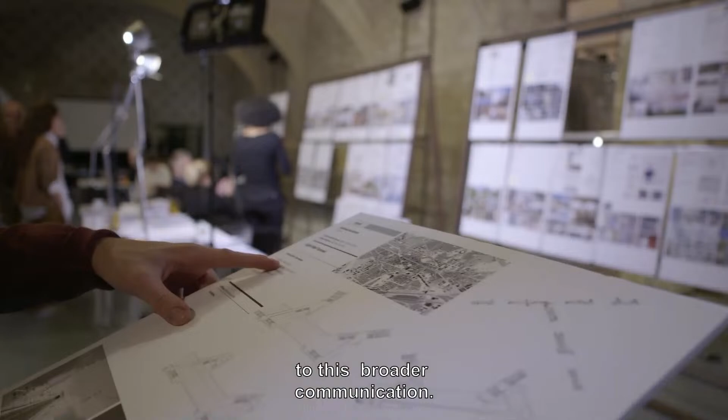I personally developed an agenda about social inclusion, contextual viability of the buildings, and innovation and sustainability. So these three pillars combined with the fourth one, that is simply beauty, which we somehow cannot take away when looking at architecture.

Architecture has to have a convincing narrative, otherwise it cannot convince the public that it should be accepted. This is the key. The architect has to find a way to explain his story. And if this is not clear, the architecture is not functioning.

Right now the energy is building up quite nicely. As you can see, we're getting a bit red cheeks, and the voices are getting a bit louder, and yeah, I guess the discussions are a bit more intense. So it's nice.

I think we need to work on a very thin edge. What I see has to have an impact on me, it has to shake me somehow. But at the same time, we want to always be aware of what's happening, how our work is impacting the physical world.

So if we're able to keep these two worlds together, maybe we can save a role for the architects in the future. When I look at the buildings, I have to understand what is behind the facade. So why is it there, for whom, and how can it be used?

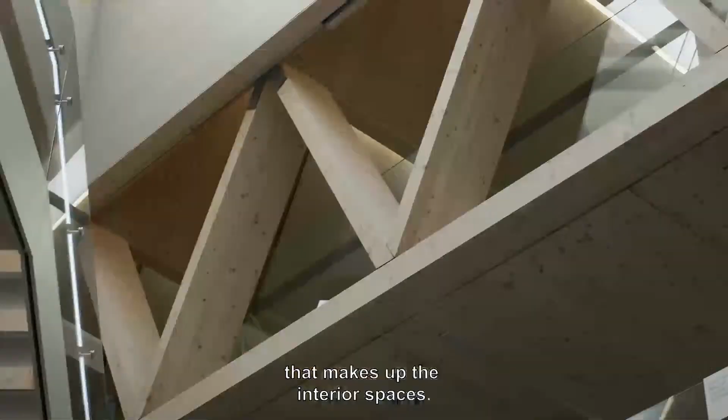And the second video we are going to see is about the winner of the Emerging Architecture Award, who we also have one of the architects later on here in the event. It is about the study pavilion on the campus of the Technical University of Braunschweig by Gustav Düsing and Max Hacke, Berlin.

I think the very shortest thing I can say about the building is that it's open in all means. It's open in its way to be used, it's open in the way it looks from the outside, and on the inside possibilities are open. It's meant to be a space where you can randomly bump into each other. So it's a bit of a counter model to, let's say, the digital sphere, where you don't accidentally meet people. It's full of life and people using this building inside and out. I see a really lovely mixture of interactions that we don't have at this university so far.

We wanted to create a building that really celebrates student culture. You can look at this building as a new kind of campus typology that puts the social and informal learning activities first and provides an alternative model to, let's say, a lecture hall.

Congratulations again to these winners, and thank you for your attention.

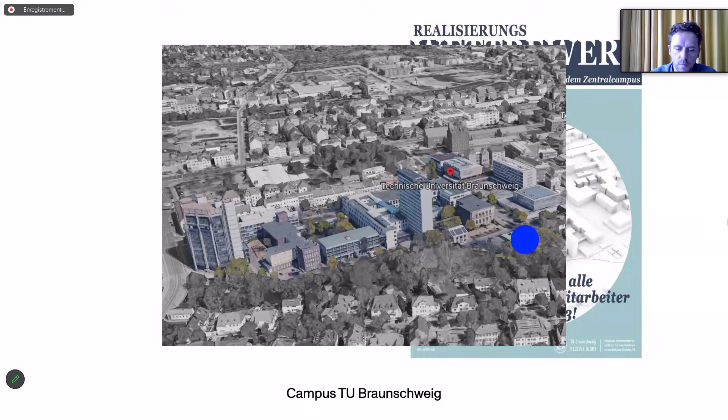So when working on these competitions, we were inspired by something at the university called the drawing rooms. They are existing spaces at the campus, going back a long time, essentially self-organized spaces by the students that really celebrate student culture. There are lots of parties, lots of social events, so they're not just a desk where you learn and work, but much more than that.

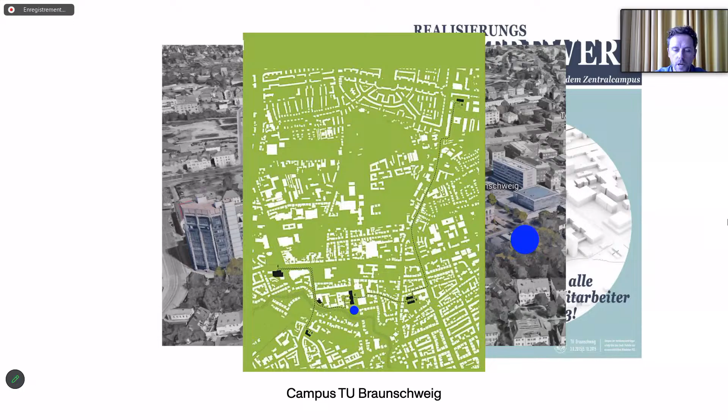So we thought all this really needs is a new framework, a new spatial framework. The culture is already there, and it really just needs a new infrastructure.

So we designed this building as one big open room, a democratic space for everyone. It is accessible from all different sides, has different levels, many stairs to articulate the idea of accessibility and visual connections inside the space. We also gave the building a covered outdoor space to extend the building into the surrounding nature and provide outdoor workspace.

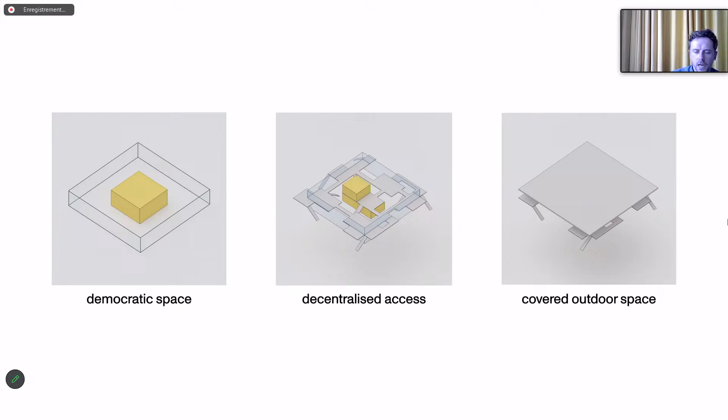So we've always looked at this building as essentially the living room of the campus. It is, on the one hand, the first building you see when you come to campus, but is also one that you can literally walk through on your way to somewhere else. So it has this social idea also on an urban scale.

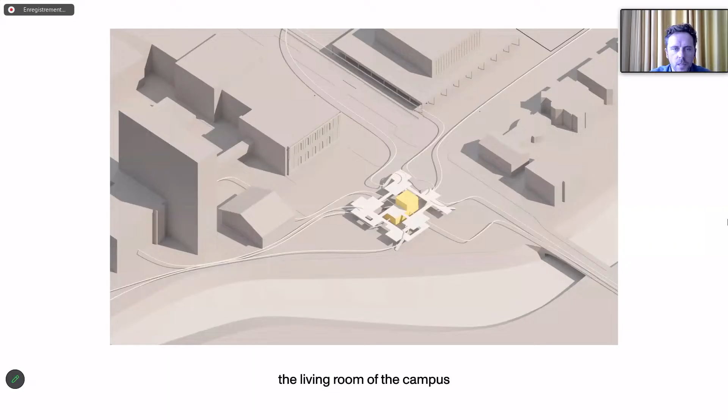Here's some references that inspired us when designing this building: Cedric Price's Fun Palace, and Yona Friedman's La Ville Spatiale, both examples of mobile architecture, an architecture that is highly flexible and can change tectonically on various scales.

And that's something we translated into this idea of a superstructure, which is essentially just a 3 by 3 meter structural grid. That provides, beyond the structure of the building, also the technical infrastructure of the building. So you can plug yourself with your laptop into a column, for example.

And it can thereby change on a daily time scale very rapidly. It can change on a more yearly scale too, in that it can be densified if the requirements would ever change on campus for more space, and it is completely demountable also. It can be taken apart back into its original pieces, transported somewhere else, and put back together in a different form, possibly also for a different use.

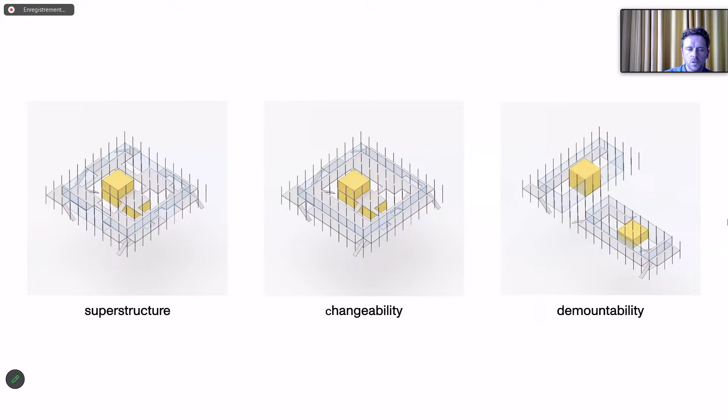While designing this, it was very important for us to keep a level of simplicity in the construction. So it is a steel-wood hybrid construction that is essentially based on only one module, which is a 10 by 10 centimeter steel tube that makes all the columns and beams, and inserted are the timber platforms held in place by various staircases that are structurally stiffening this building.

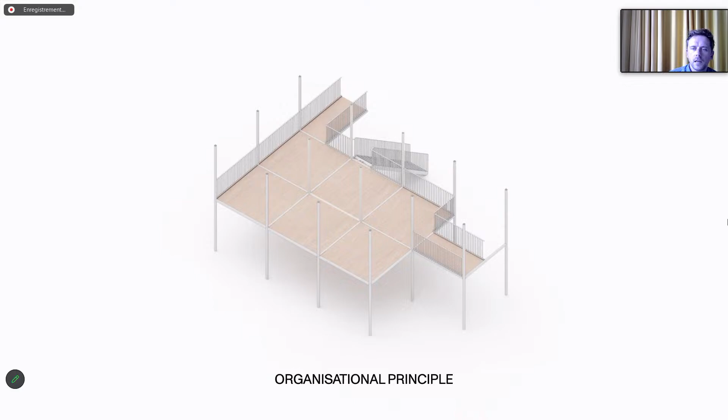And when you keep adding these elements, you create islands, you create bridges, you create a really flexible workspace, but also one that creates an enormous amount of density and spatial complexity while also being very simple. This was very important for us: to have this very simple kit of parts, which relies on very few elements that are repetitive and repeated throughout the buildings. But then when you put them together, it creates a very complex spatial framework and network.

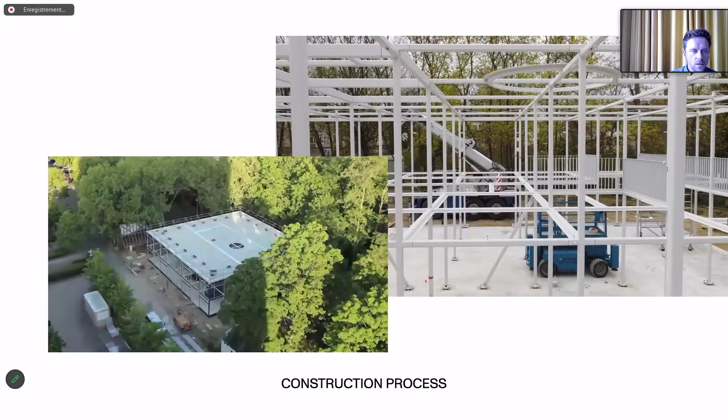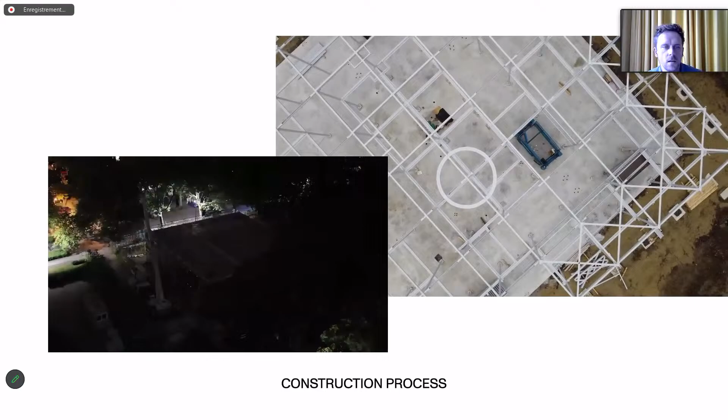Here you can see some videos of the construction process on a time lapse, where you can see how quickly this whole thing was built because of its modular qualities. This only took something like 3 weeks to put together - that is the entire structure, including the facade and the roof structure. And then here you see the outer colonnade being put up as well. This, as I said, is a very quick time lapse.

A little word about the sustainable or energy efficiency aspect: the building is a lightweight structure that heavily relies on renewable energies. It is connected to a district heating system, and in Braunschweig, the district heating is one of the most sustainable ones in Germany, relying on more than 80% renewable energies.

The building also has a geothermal cooling system. Both heating and cooling work via the underfloor heating system, and the building is fully naturally ventilated, so there's very little technical infrastructure in this building. There's very little solar heat gain in summer due to the overhang of the roof, but in winter, when the sun is low and you do want the solar heat gain, and there's no leaves on the trees around, you do get it.

The building has extremely high acoustic standards, so when you walk in, almost everyone has this experience of, wow, this is actually better than we thought. And it has obviously incredible daylight qualities, so there's very little use of artificial lighting. There is a photovoltaic and green roof plan - it hasn't been realized yet due to a lack of funding, but the capacity of the building is there and will hopefully be realized soon.

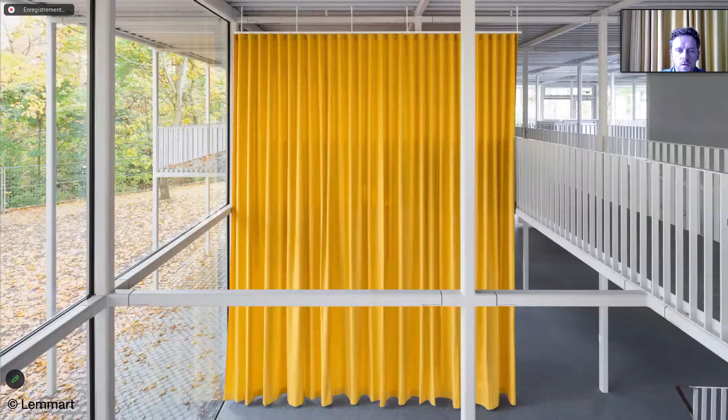This is shortly after completion, when you could fully experience this new campus infrastructure, almost like an X-ray vision, still empty. There are a few moments throughout this building with many double-height bridges that give students the possibility to experiment, potentially prototype on a large scale.

The building opened about 1.5 years ago. At first, students were very timid and weren't really sure what type of building this is and how to act in this building. And slowly they're coming to understand that it's really their building, a building for them to inhabit and to control.

And this is some footage from last summer where you can see how this is really becoming more and more a buzzing space where people carry out the furniture into the outdoor space and work there. A lot of group work, a lot of workshop is happening, a lot of communication and exchange.

And as I say this, I'm coming to the end of my presentation. There's actually two more slides. There's a little word about the exterior space, which is a space that is obviously used in seasonal change when there's spring and summer. That allows for an additional expansion of the building. And yes, now I'm at the end of the presentation, as we can watch this flyby video of the end of the day in an autumn day in this building at TU Braunschweig. Thank you.

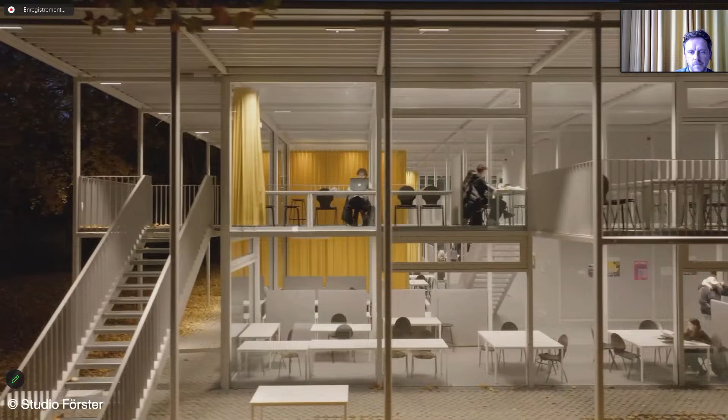Thank you so much, Max. What an amazing insight into the process and how you have thought about using resources to achieve high quality of life and environment. I think you mentioned before the new social and collective dynamics, and I think we can really see how these many priorities and drivers come together in this building, and I'm absolutely not surprised that it was picked as the award winner this year. I hope you can stay on to field some questions in about 20 minutes once we have had Sophie's and Jose's introduction or presentation as well.

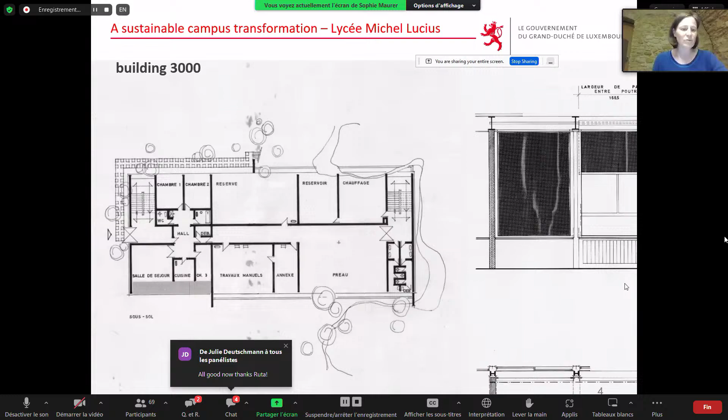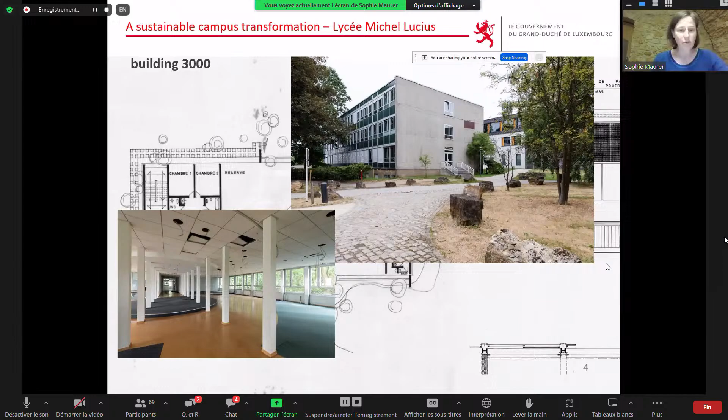So again, we have the building of the 70s, we have the temporary building of the 90s, and we have the central courtyard, which has been used from 2018 until our project in 2019 as a parking lot, which was a little not what was intended at the beginning. Then we have the existing building 3000, which had to be liberated because it could no longer be refurbished or used. The structure was not strong enough to support what we needed to adapt it for use.

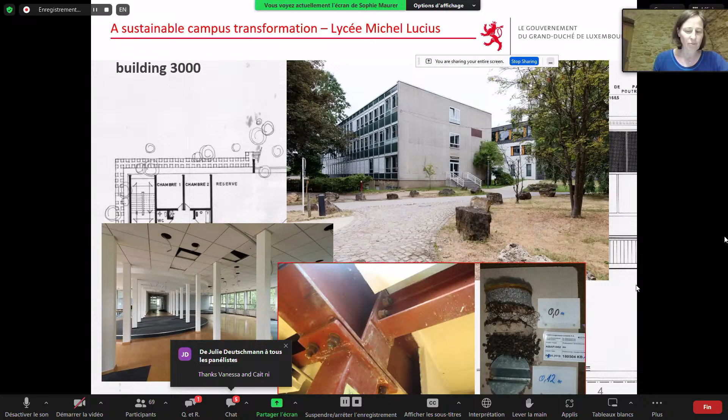Here you can see we have a steel structure and the flooring, which was quite minimal. You can see the corrugated steel, and there was not much above.

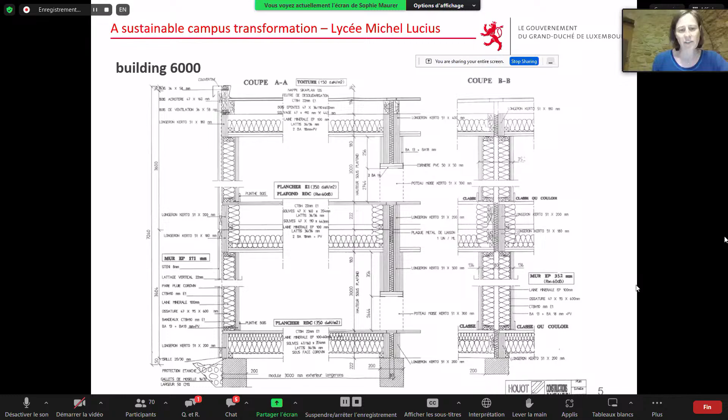The 6000 was similar, but it was a wooden structure, and it was a temporary building which was still there in 2019. There were only classrooms in this building, and we didn't have lots of plans, so we had to make openings to see how the walls were constructed. That was actually where we started.

We had the building 3000, which we could no longer use, with a library inside, and we had the 6000, which the school didn't want to use anymore. What we thought was fit to be refurbished and to house the library.

Then we had a few different topics we treated, and it wasn't this linear project. It was more something came and then something else and then something else came again. And so at the end it became a whole project, but it never started out as this project.

So we worked on the public tender process, working out how to give away furniture that we were no longer using, but the state is not allowed to give away something. So we had to develop a system how to make a contract with someone so basically they could get this furniture, and we set this up.

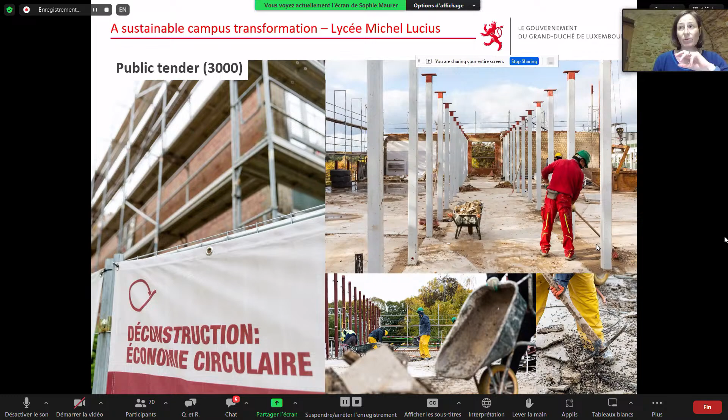Then we developed a system how to rate the procurement so that we could select other criteria than the price. That's an outcome of the project.

Then we were salvaging all the material we could, which was the aim of the project, because it was a pilot project. So we said, okay, we will see what we can get out of this building and see what we will do with it later. So you can see we had the steel, obviously, we had the window frames, but we also have the floor boards, the corrugated steel. Then we have the ceiling panels, and we have some bricks.

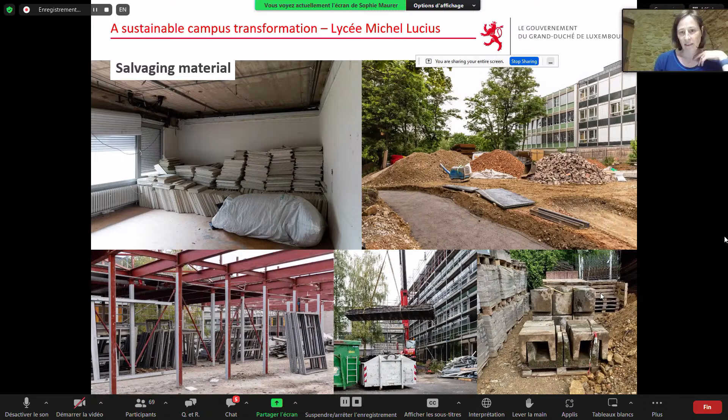For the 6,000, we said, okay, if we demolish the whole building and construct a new building, it didn't need to be as big as the first one because the library was smaller than the existing volume. We would need a lot of new material to build that. And then we made a life cycle analysis, which showed that we only needed a fraction of that, and we would cause a fraction of the environmental costs by refurbishing the building, even if this meant major transformations.

Then we did a small pilot project on concrete recycling. We worked together with policymakers to see how much recycled material we could use inside the concrete, which is still running. So they are evaluating how the concrete is behaving in the exterior. And I know that concrete recycling is already big in some countries, but in Luxembourg it's not yet. So that was an important step.

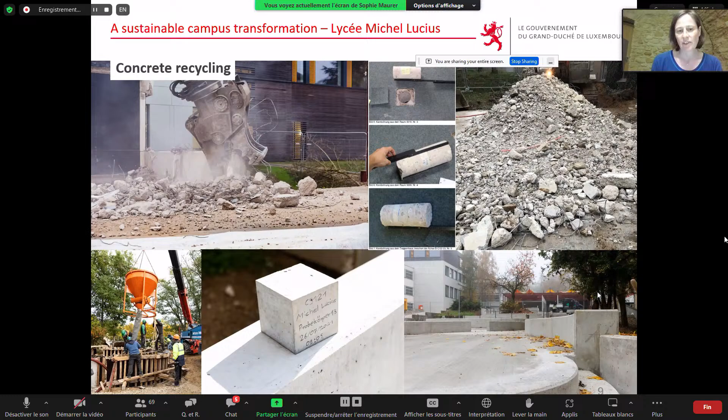Then we said, okay, we want to improve the comfort of the building. And we didn't want to put a lot of new technical equipment in this old building. First, I forgot to say that it's also another temporary use because the whole school campus is going to move away in about 10 years' time. So we looked for a solution that was easy and manual. And we found that the crawl space under the building was very cool in summer.

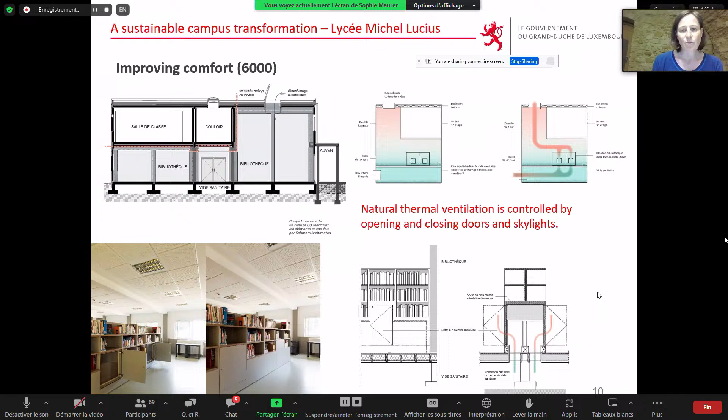So we could use the air coming through the crawl space and create new double heights for the library. So we had to cut out two classrooms, and basically that's our cooling system, and it works quite beautifully.

Then we also built with the reclaimed material. Here you can see the steel columns and beams we deconstructed from the old building. And we put up a new pergola, which we completed with new sails, so that we have a totally new quality on this campus.

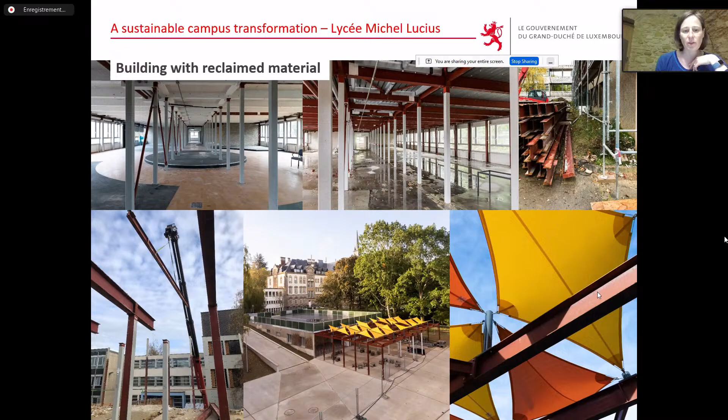You can also see that the basement was kept for a part, so that we now have new storage facilities for the school and also a new roof terrace.

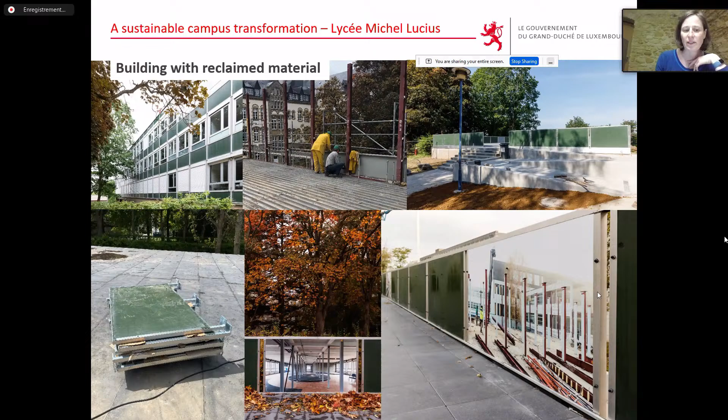Another example of reuse with the reclaimed material were the facade elements, which we used to build a new railing. We didn't have enough green elements, so we completed some of the just gray elements with pictures of the deconstruction. So now you can see on site what was there before and how we did our project.

What I said before is there were all different elements and they came nicely together, so that now we have this nice project which looks as if it would have been done by one person with a starting idea, but it wasn't. It was all small elements that came together over time. And with the idea of building something sustainable for the school, we were able to direct it all in just one focus.

Voila. And I'm always saying, you're not doing this project alone. No architectural project is done alone, but especially a sustainable reuse project, it's impossible to do on your own. So we had a very big team, and we were talking also with lots of policymakers, which was interesting because they were all very eager to help. We made the experience that everyone, when we came to them and said we have this problem, everyone tried to help. It wasn't always possible, but we found a lot of solutions like this.

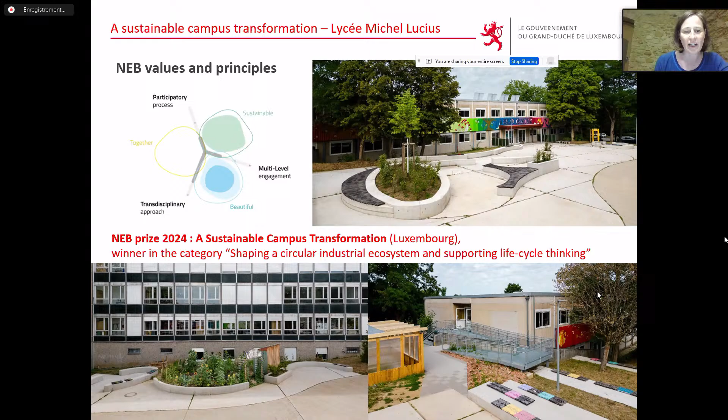So I tried to put this in the different frameworks. I'm not sure everything is correct, but here you can see the New European Bauhaus values and principles, and how I would rate this project. The Bauhaus criteria — here of course we don't have any economic background because it's a school, but we did work on the context, the functionality, and especially on the place.

And I find the picture on the lower left especially nice, because you can see on the other building they have the exact same facade panels, where you can see now in our railing that they are the same ones that still exist in the building. So you can see where they're coming from.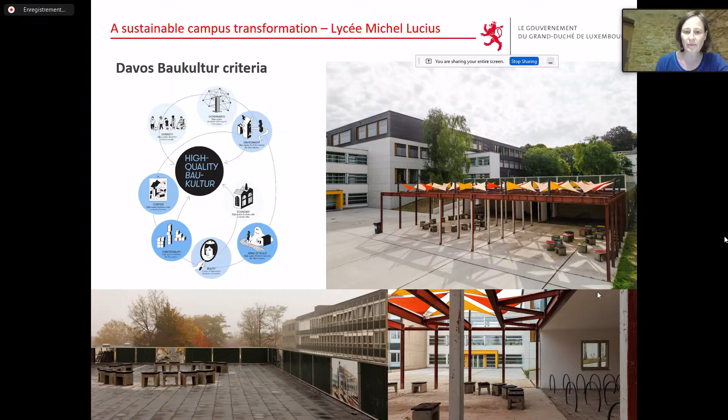And finally, the levels indicators. Yes, we worked a lot on efficiency, resource-efficient buildings and circular materials. We tried to make the most comfortable spaces possible, and also tried to optimize the cost and the value for the students.

If you want to know more, here's my contact, or we also did a publication where you can see the project in depth, but it's in French, so I'm happy to help. Thank you.

Thank you very much, Sophie. It's wonderful to see a project before and after, and such effective transformation of the public realm. It's also really interesting to see the LCA process helping to make design decisions, and we'll hope to touch on that a bit later in the debate. But thank you so much for sharing that example and the process of your thinking. I hope you can stay on for the questions.

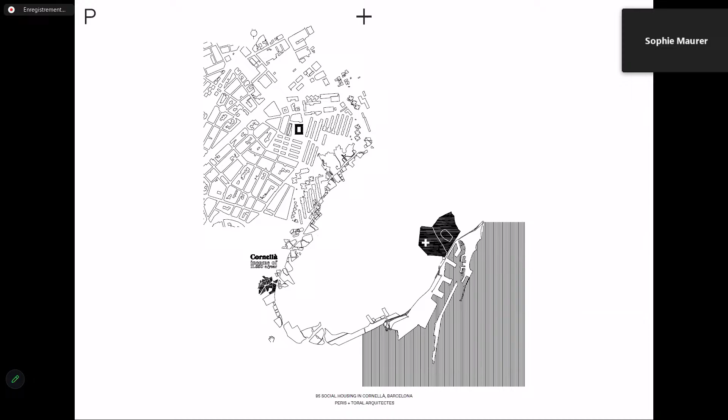We had this plot—it was a competition, a plot of 25 by 41—and the regulations told us we had to fit on this space and also have a patio of 15 by 25. That gives the sensation that we cannot decide the shaping for the city.

But then we decided, okay, let's begin the competition thinking from the interior. So what we did was try to change the unit of aggregation: instead of using the dwelling as the smaller unit, use the room as the smaller unit and make equal rooms.

So we fulfill the plot with equal rooms, and because when things are equal, there is no hierarchy, we think this is something that can answer some of the challenges we have in the 21st century.

When we have equal spaces, that means there's no bigger room for parents than for sons, and that means maybe new kinds of family, not only the nuclear family, can fit in these homes. Also, by equaling spaces, we gain some flexibility—flexibility of moving the furniture, because when spaces are equal, they're very easily interchangeable.

So the big question was: what has to be the size of a room for this to happen? In Spain, our regulations give very small rooms—a single room of 6 square meters, a double room of 8 square meters, a main room of 10 square meters. We thought that was not enough to be a living room or a dining room with a kitchen.

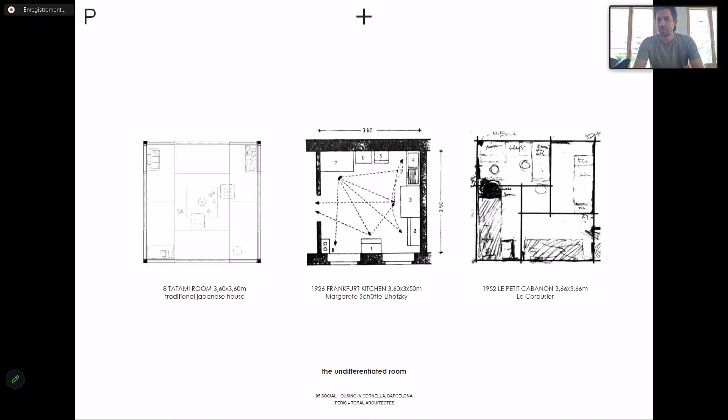Then we found out that one version of the Grete Lihotzky Frankfurt Kitchen measured 360 by 350, and Le Petit Cabanon of Le Corbusier measured 366 by 366. That means we had the most technical room, the most flexible room, and the room of thinking of Le Corbusier, all fitting in the matrix.

At this point, we knew that maybe the center part would have more of the bathrooms and kitchens. Then we began to put the cores in the corners, placing the dwellings with cross ventilation through the patio.

We had this situation where maybe this 360 distance between the walls could be good for rethinking the structure with a timber structure. So one of the first decisions, following this idea of sharing, instead of entering directly into each stairwell, we decided to make a porch to give the building a door to the city.

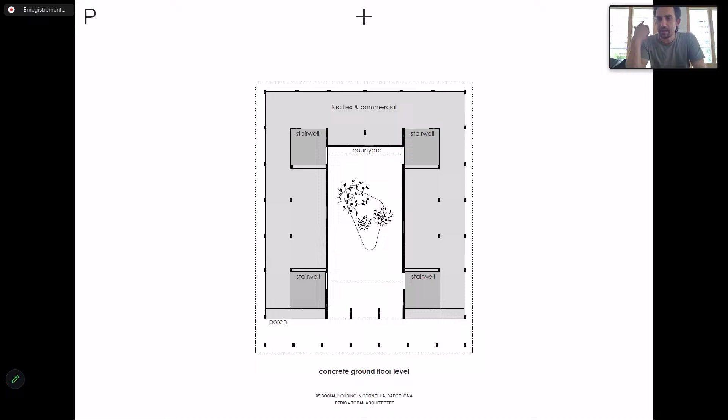Everybody enters through the courtyard, so it's one of these intermediate spaces that has an environmental behavior but also becomes a social space. This increases the feeling of belonging for the whole community. They all share the same gate, they all get to know each other, and they have these social spaces through here—it's like the Viennese Hof.

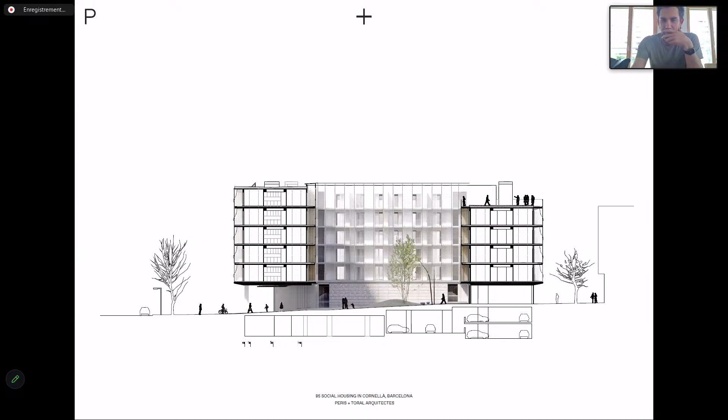So we have this situation: a porch, a shadow space, with south coming from here, and a sun space. When the sun hits, this is hot air, and here we have cold air, generating some movement of air and a microclimate in these spaces. This is the importance of this fence—to allow transparency, to allow the wind to go through, but not look like it has to be more of a filter.

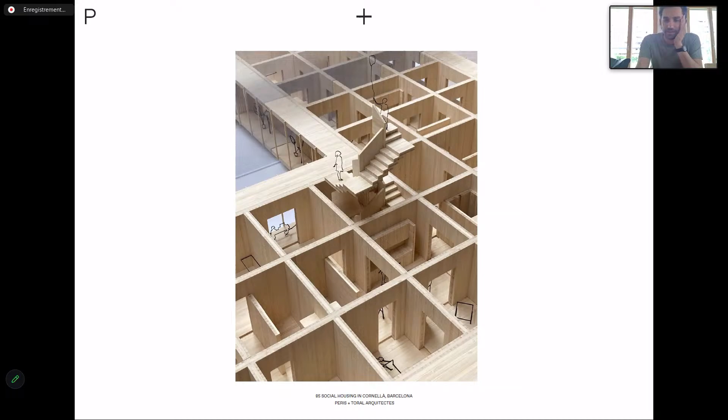From inside, there's also transparency—this is one of the stairwells. As we were saying, we go through the porch, we enter through here, and even all the communal space fits into this matrix of rooms, not even the stairs stand out. So we end up with a floor plan where it's difficult to know the difference between the different units and even the communal spaces.

All of them share this equality of rooms, but what we know is that we have these buffers to relate the interior spaces with the exterior. So we use this intermediate space again for a climatic reason, but also for social relations between neighbors.

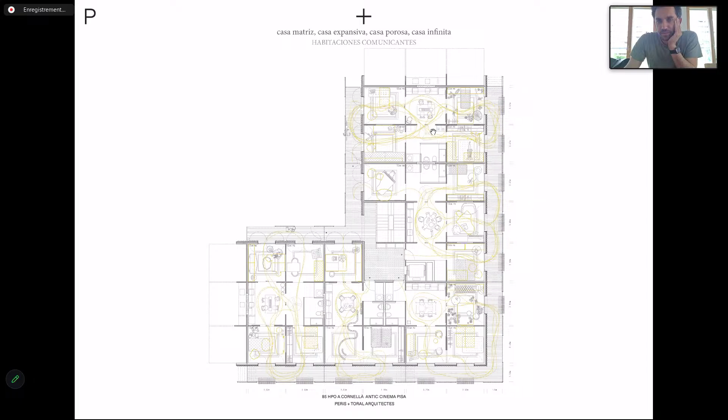Just to explain how it works: we have this room where the lift lets you out, and a room for the stairs—this is the only part of the corridor. Some of the units we enter through the terrace, and others we enter directly. Normally we have these 6 modules, which is 3 bedrooms with 3 day-life spaces: the kitchen with the dining room, the living room, and the washing area.

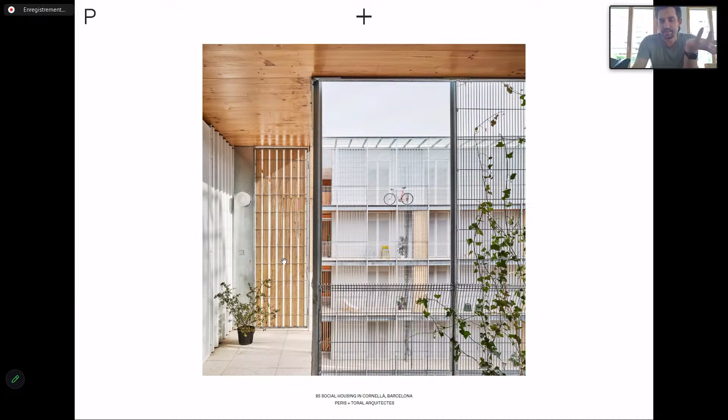As I was telling you, this is the communal area—one gate, one door that you enter through. So you would get through here, through this stair. And here, from the interior part, from inside, is one of the terraces.

When you are in one of these rooms, around 13 square meters, you're also working with this idea of the enfilade, of wide openings—not only the typical 80 centimeter opening between rooms. So we use wide openings so that whenever we open the doors, we get the feeling that one space joins the other.

Putting the kitchen in the center shows the domestic work, working against the role of gender by showing the domestic work that we need—showing the kitchen, showing the washing areas—and putting them in the middle so they become the core of the house. This also allows us to do a house with no corridors, putting the surface of the corridors into the bedrooms.

There's also this idea of sliding doors that allow us to join spaces or separate them whenever we want. This intermediate space, the terrace with shadow—the exterior solar protection—generates an intermediate space that can decrease the temperature by 1-2 degrees in the summer.

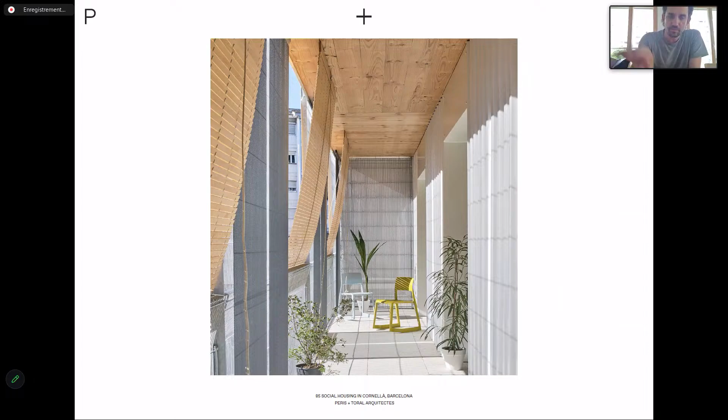This mesh filters the life of the building. We can see how furniture comes through, working with the idea of corners that allow us to place furniture. Even working with small spaces of 13 square meters, you're able to see 4 spaces from one point of view, because of this idea of working with the porosity of the space. Also, these filters give some intimacy to the corridors.

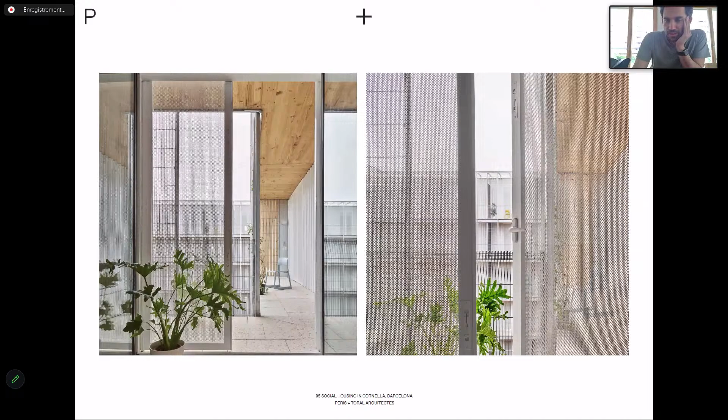And then when we go up, we have some shared spaces for the community—terraces where the community can go and have social spaces.

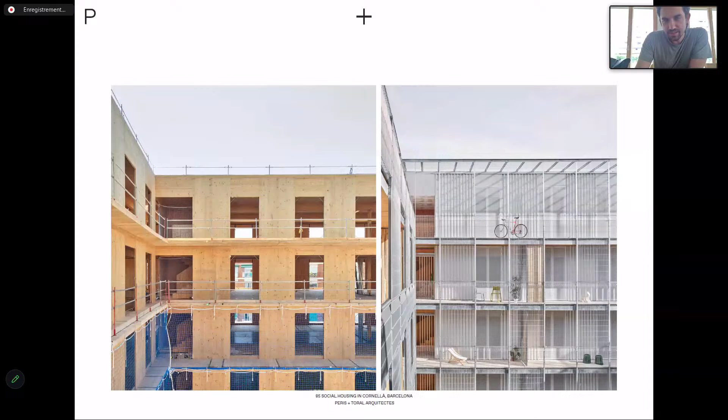This is all done with a new way of construction using a timber structure, which has been a challenge to solve all the fire, acoustic, and budget problems—especially because this is social housing and we did it with a really low budget.

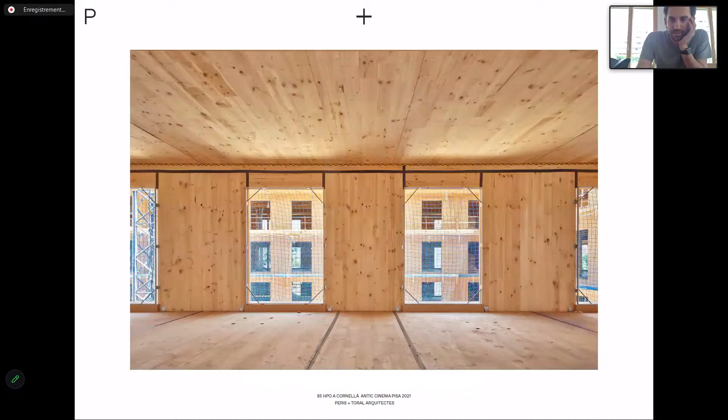This is the construction: week 1, week 2, week 3, week 4. The stairs came in one piece and were fitted here; now everything is going up around the stairs. Week 8, week 9—in 2 months we were able to raise these 5 stories of housing.

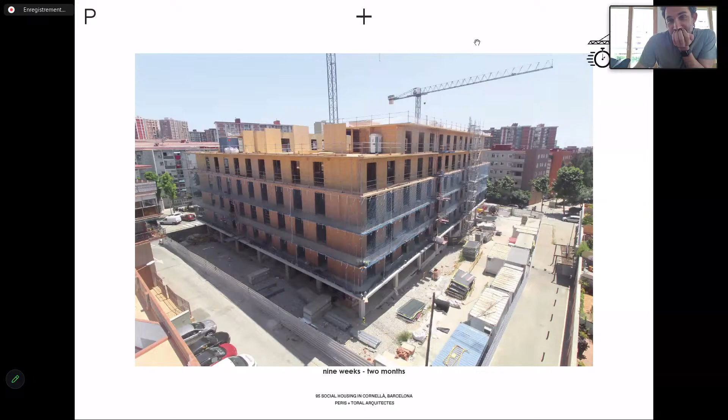Thank you so much, Jose. It's really wonderful to see this project. I had to stop myself thinking, I want to see the thermal bridge detail, but...

I think what's amazing is all these projects have risen to the challenge of social and cultural transformation through a huge amount of creativity, and the result is really a change in body politic. What's fascinating is how much thought goes into the human interactions and the way people occupy space in creating these innovative ways of building. It's no surprise that most of the projects we've selected for today are mostly public sector projects. I think perhaps there's a commonality in being given the extra time to think through these interactions and design them into a building.

I'm very curious to hear your thoughts from the speakers about how that was made possible, and whether it's replicable, and how. Right now, I'd like to invite Sven and Jutta to come share the podium again. There are two microphones there.

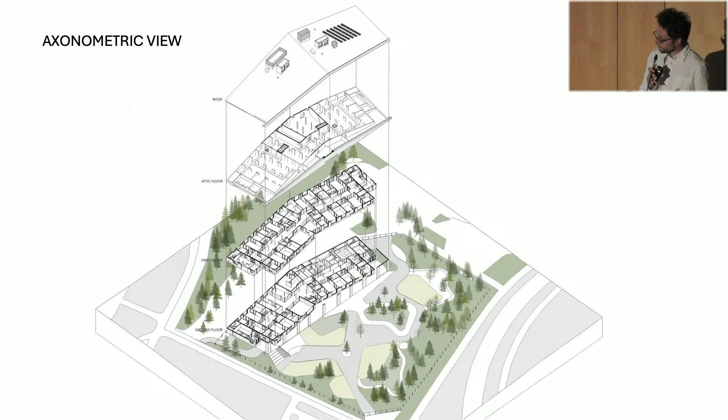So now, the construction choices.

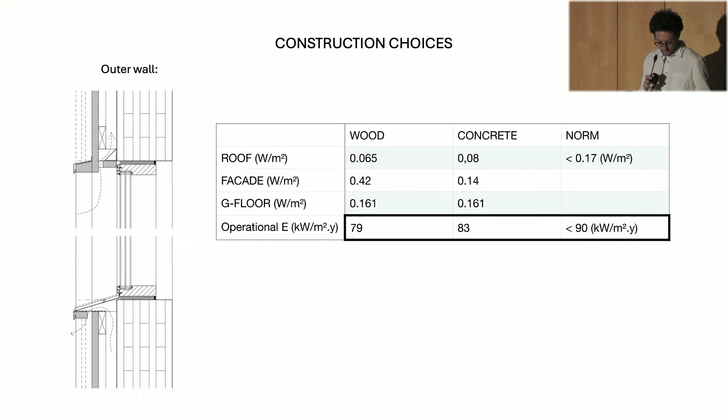After the problems of the previous kindergarten, the city tender insisted on having a healthy construction, and the architect went for a solid 240mm thick CLT wall without insulation. It is untreated also. The general rule in Finland is to have outside walls with a U value under 0.17 watts per square meter.

There's a specific rule for wood allowing it to be under 0.4 watts per square meter. By having a better performing roof and better performing ground floor, they managed to get operational energy under 90 kilowatts per square meter per year, which is much higher than the Spanish project we had before.

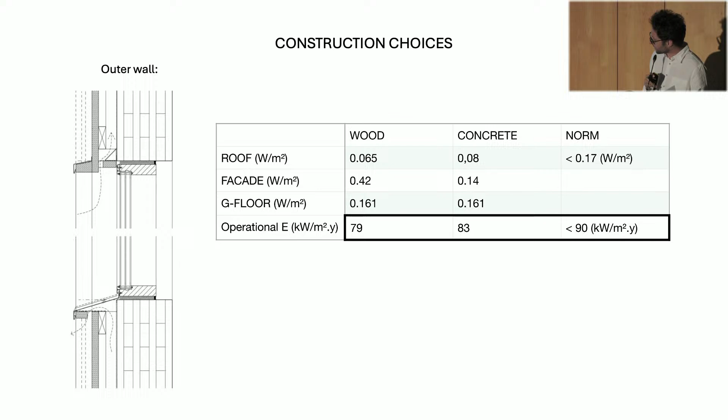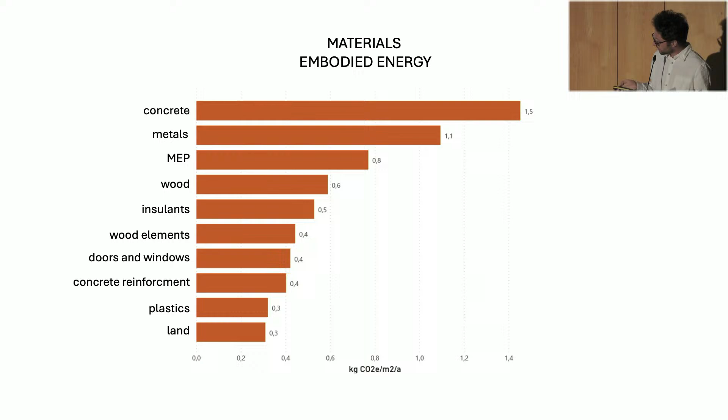Here are the emissions per material. Without surprise, concrete, metals, and mechanical equipment are the highest. And now, the most interesting part: the embodied energy per building part. The three biggest polluters are the building piles, the ground floor, and the building pads, meaning everything under the foot area. The building above is mostly wood and has quite excellent embodied energy.

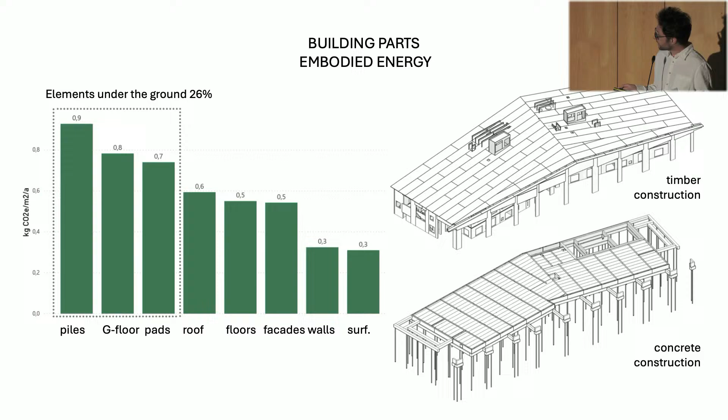So what does this life cycle tell us? That the early design choices had the biggest impact. The simple, rational, and healthy construction system could be balanced by having an excellent traditional cold roof, and that the huge foundation work, accounting for 26% of the global carbon emissions and depending largely on city planning, was unavoidable.

How could we improve it? A different location, of course, and premium materials such as zero carbon or recycled steel, concrete, asphalt, gravel, wooden frames for the windows and inner walls, cellulose or glass wool instead of mineral wool together would have lowered the life cycle by an additional 12%.

Overall, this is a showcase of excellent public design carried out by a dedicated team of architects and specialists. Thank you very much for your attention.

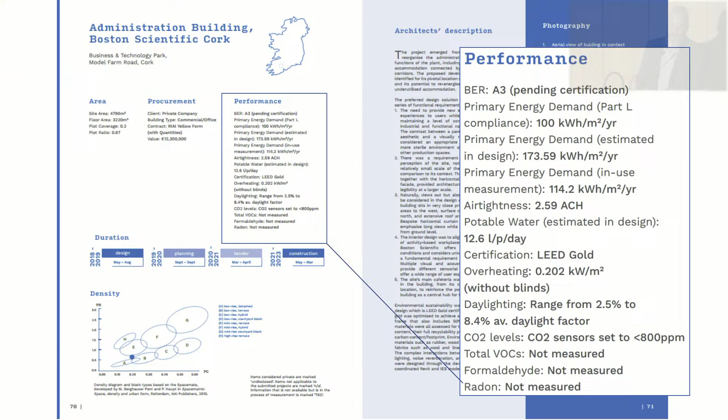Where we continue to reflect, and where we look for guidance from the Architects' Council of Europe and our colleagues here today, is how we support this transition to designing for performance, not compliance, in a manner that does not result in unfair additional unpaid workload and liability on our architectural profession.

So I should say I've pulled these projects from a long list of 42, from the short list of this year's RIAI Awards. The awards will be announced on the 21st of June, and they're presented here today as examples of a diversity of approach, from energy efficient retrofits to social sustainability.

The Tom Johnson House is an example of a deep retrofit refurbishment of an existing 6-story 1970s office development, the sort of scheme we routinely see demolished now, certainly in Dublin. This scheme provides a new office headquarters for a government department. The project transformed obstacles into opportunities.

Because of the low ceiling heights, the existing suspended ceilings were removed, exposing the original waffle slab, which, combined with automatically opening windows controlled by the building's management system, allows the structure to be passively cooled through nighttime ventilation. The reduction in plant space at roof level due to the introduction of a new central atrium inspired the move away from fossil fuels to external heat pumps with a backup biofuel generator.

The embodied carbon of the refurbishment, at 287 kilos, is 51% of what the new build option would be. And over 97% of the construction waste from the refurbishment works was separated and recycled.

The design consists of a full reorganization of the existing building, achieved through two major connecting elements: a central atrium and a new horizontal thoroughfare.

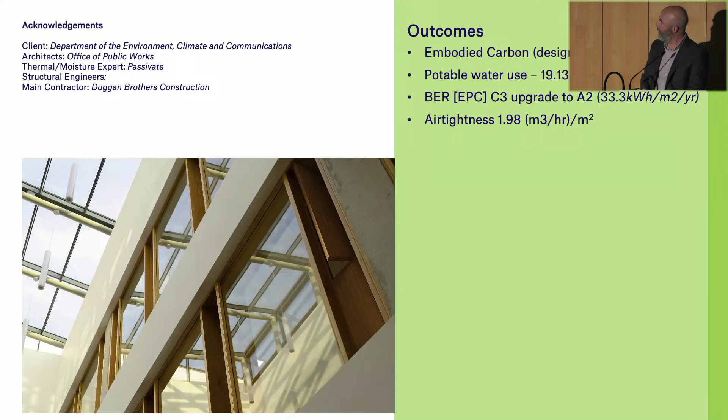Kinsale is a small medieval town in County Cork, in the southwest of Ireland. This former grain store, built in 1840, is in an area we would refer to as a zone of archaeological potential.

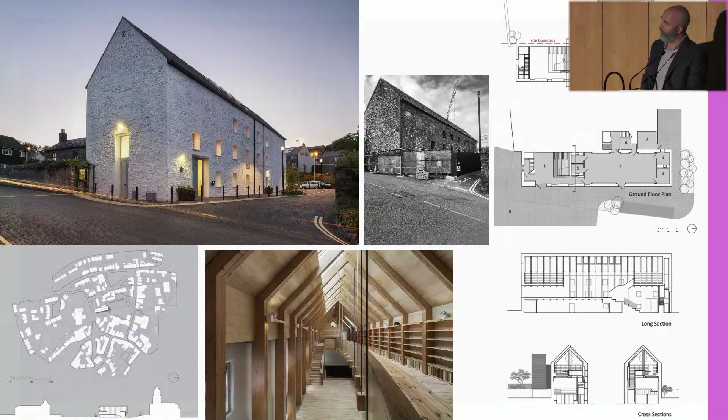It was badly damaged by fire on a couple of occasions, and the building's original roof, apexes and internal floors were all lost before it was acquired by the County Council, which has now transformed the structure into a public library and exhibition space.

Nothing remained of the original floor plate, so this new structure, including floor decks, shelving and stairs, was all hung from the existing ring beam, which reduced excavations and the requirement for concrete underpinning.

The material interventions are almost all timber: cross-laminated timber floor, glue-laminated timber panels and rafters, and plywood sheeting, as well as all ceiling linings, with walls internally insulated with cork and externally finished with a shelter coat of lime render, which protects the building but allows the patterns and texture of the rubble walls to be expressed.

This small town has a population of about 5,300, yet in the first 4 months since opening there were 52,700 visits. It's open to the local community 365 days a year through a My Open Library project, which allows unstaffed self-service visits where you can borrow and return items, print, photocopy, use the internet or access Wi-Fi in the study space.

So these are 2 of the 42 projects now running for the RIAI Public Choice Award, with projects ranging from houses to housing, distilleries, laboratories, and all can be viewed on the RIAI website. I invite you to visit and vote. Thank you.

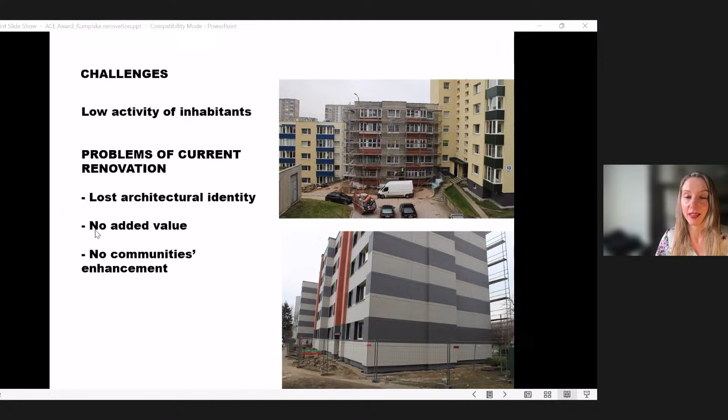And the programs that we have, they only support the insulation of the facades and renovation of infrastructure of the houses. The activity of inhabitants wanting to do the renovation is really low, and that's why, because after renovation, the architectural identity is lost. There is no added value for individual apartments nor to public spaces, and there is no communities enhancement. So we think that architecture has tools to implement energy sustainable technologies together with a design of spaces that would make an attractive, comfortable home for the end user.

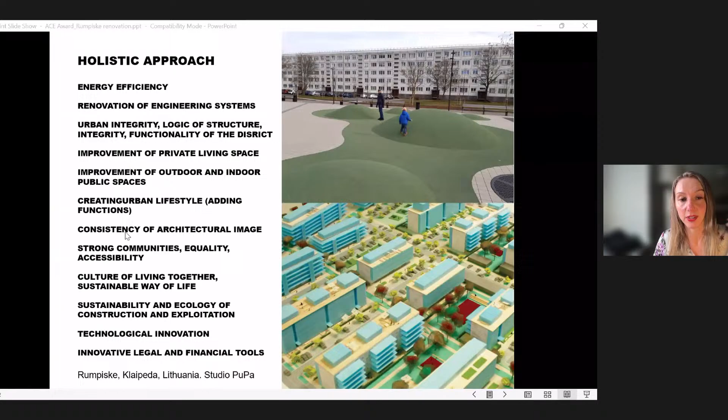And we advocate for a holistic approach, which is not only energy efficiency and renovation of engineering systems, but way more. It's urban integrity, improvement of private living space, improvement of outdoor and indoor public spaces, creating urban lifestyle, consistency of architectural image, building strong communities, equality and accessibility, building up culture of living together, sustainable way of life, sustainability and ecology of construction and exploitation, technological innovation, and adapting innovative legal and financial tools.

The project of Rumpiškė is one of a kind because it happened almost accidentally. What happened? The municipality of Klaipėda decided that they wanted to create an urban vision for the whole district, and they announced a tender. This tender was won by a really great architectural studio, which was luck number one, because when you have a tender won by lowest price, you can imagine what kind of quality you get for the urban vision.

But this was a very wise step by the municipality, first to make an urban vision, because if you want to get to a quality reconstruction or renovation, you have to start with urban scale. Then, secondly, when they had that vision, the municipality announced other tenders also by lowest price, and luckily they were also won by the same studio, Pupa from Lithuania, and these were tenders for the general public spaces in the area. So they designed Oak Park, Vaidila Square, and also the pond area.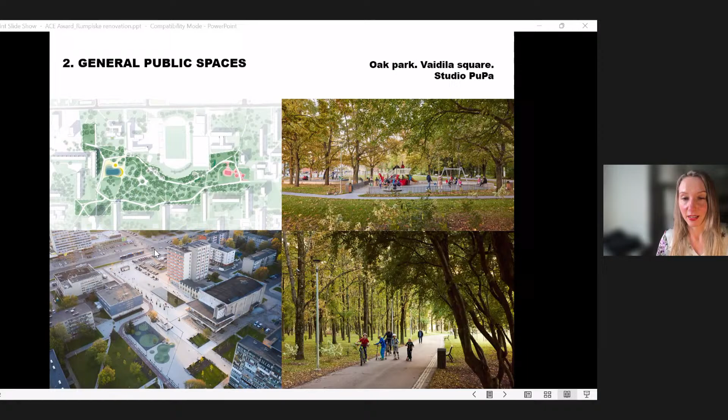These areas were originally designed in the 1970s, but as you can imagine, they were derelict and not many things were happening there. Especially those places lacked infrastructure for children, teenagers, and elderly people. So what the architects did, of course, was aesthetic planning, a lot of dendrology solutions, but also they installed furniture, playgrounds, equipment, so that society could see and use those spaces daily. And these are the examples.

Then going to the smaller scale, in the urban vision, the architects also embedded solutions and proposals for the courtyard spaces. The courtyard spaces are not property of the municipality, so it was not in the hands of the municipality to implement those principles on how to make parking places, how to make those semi-private spaces where the community could gather, where children and elderly could gather.

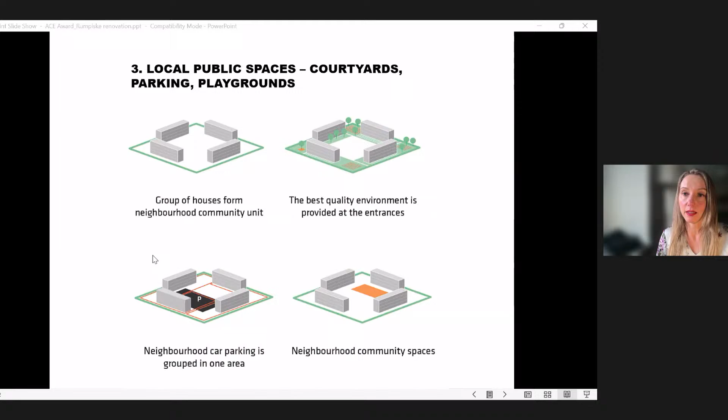But once the projects were started by the communities themselves, the municipality took those guidelines and gave them to the communities and to the builders and said, look, do it in this way. So they did. That's how it was done. Of course, the solutions for general public spaces and for the courtyards had to include participation of the inhabitants.

And it was the hardest part of the project, because the architects had to spend a lot of time. I think that they spent much more time on moderating, educating, and encouraging communities to discuss and come to a consensus than on the design itself. But then it ended with luck because everybody was really satisfied with the final results.

And then what happened? With public spaces, with general public spaces, with courtyards, people really felt that they were owning the place. And they felt really bad that they were still living in shabby houses. So the public spaces really concentrated communities, so they wrote applications for the renovation of houses, because there is another program for this by the government, and house by house, all these districts started to be renovated.

I have to say also that there is no possibility in Lithuania to renovate the whole district at once. It has to be house by house because of the ownership. And somehow, in this case, the architects, who were different for each house, were looking at the context of Klaipėda, and they were choosing shapes and colors and materials. You can see red brick and also white, which is quite common to Klaipėda. So then you got a kind of uniform, but also individual image of architecture.

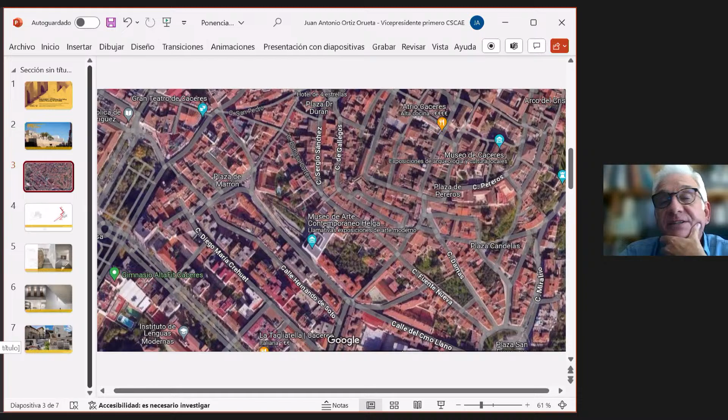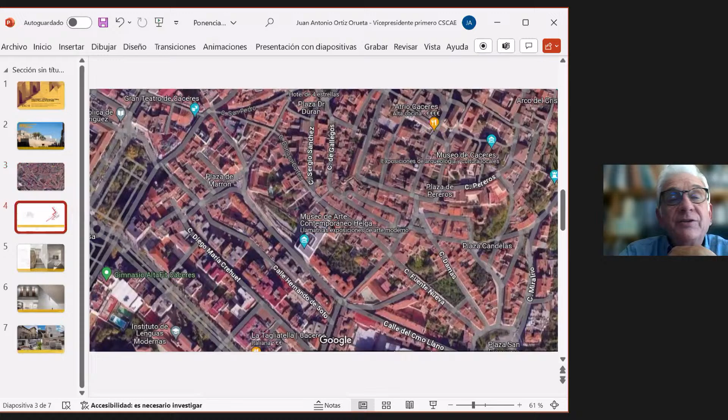...connects two different situations: this old town up over, and an uncharacteristic neighborhood, unconnected for decades. So the museum is presented as a sign of the city's identity, capable of generating a feeling of civic attachment to contemporary culture. You can see this sketch, this original sketch of the architect, and the design which attends to the itinerary connecting these two neighborhoods.

I think this project is not only a building, as I said before, because the idea of the project is always increasing the quality of the built environment in this area of the city. And it's really aligned with the Davos Baukultur criteria.

So here you can see the problem, not only with these two neighborhoods separated by a large block, but also the problem of the height of the street in the old town and the street in the new neighborhood down below. It's a lot of meters—there's a lot of meters between them.

In this plan you can see the old house, this one. This is the new building, which is an extension from the first phase. And this other one is now being built, because here an old house will be converted into a storage for the collection. And all of this space is the garden of the old house.

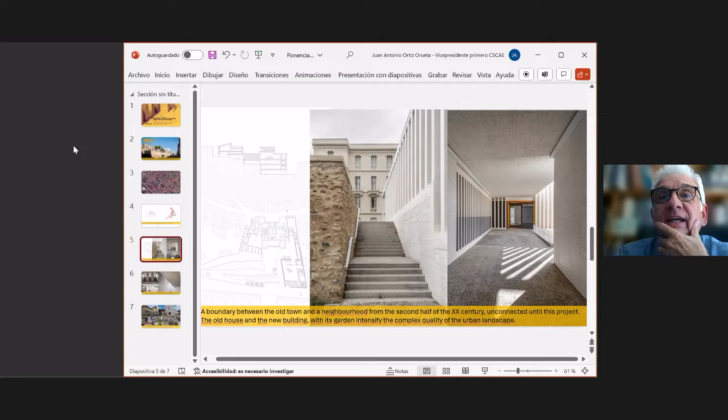So the project comes from the idea that a border could be a meeting point, and the proposal restores to the site the character of a land of transit and exchange that the areas outside the walls of the ancient city once had, making it permeable. The upper street is where the entry of the museum is, through an old house on this street, Calle Pizarro.

Under the pre-existing facade and through the back garden, a public route unfolds that is another link in the chain of squares, allowing the old Cáceres to be traversed, and is the natural way of bridging the difference in level that leads to the new part of the city. In that way, the city obtains a public artery that crosses the sphere of the private without touching it, because you can walk beside the museum to connect this itinerary between the two streets.

Another thing is that this itinerary makes an accessible route. It's necessary to have an elevator in one of the parts because of the large height difference between the streets, but it's an accessible itinerary in the city.

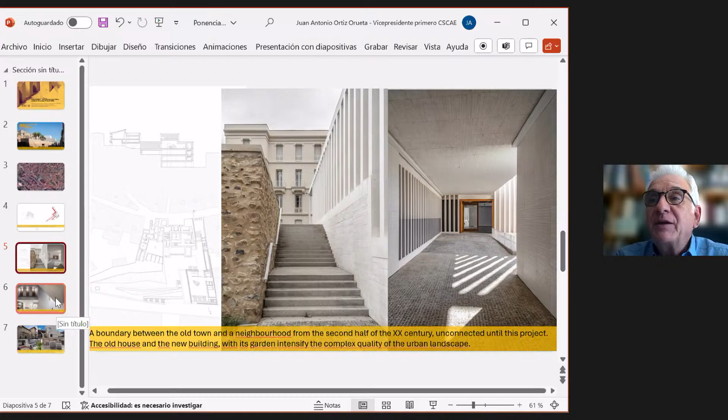Inside, this is the interior. The photo here is the interior of the entrance from the old house on the upper street. And these are some interiors of the museum.

I think you can transit beside the museum. You can enter the museum, but you also can walk as a pedestrian street between pieces of art, because this is the old house. This is the extension of the museum.

In the garden, there are some pieces of contemporary art here, or over there, or here. And even there are events, especially children's workshops or similar, that make this space into another square in the city. So cultural and artistic values are joined in this museum, which supports the sustainability and beauty of a medium city that has been a World Heritage site since 1986.

So the Helga de Alvear Museum of Contemporary Art is a construction of one of the most important cultural and artistic meeting places in the city of Cáceres.

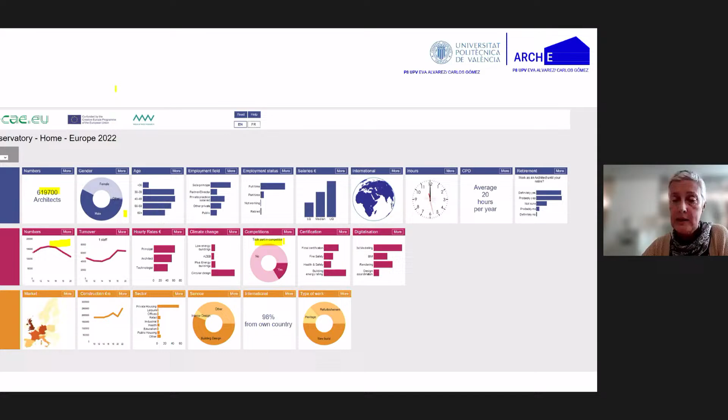If we see that, it is surprising that from these 150,000 practices in Europe, more or less depending on the year, the majority of them are one-person practices, and some of them are two-person practices. If we look at the numbers, we can see that 62% of practices in Europe are a single person.

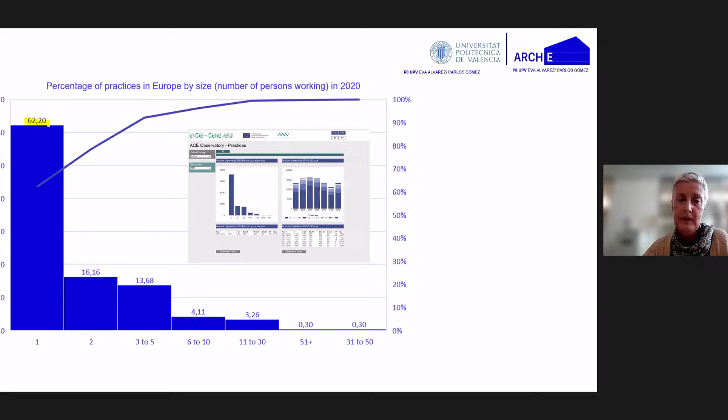We can arrive at 75% with two persons, and the majority, only 10%, are from a medium-sized big office. And only 13% of the practices are applying for competitions. That is a very small part.

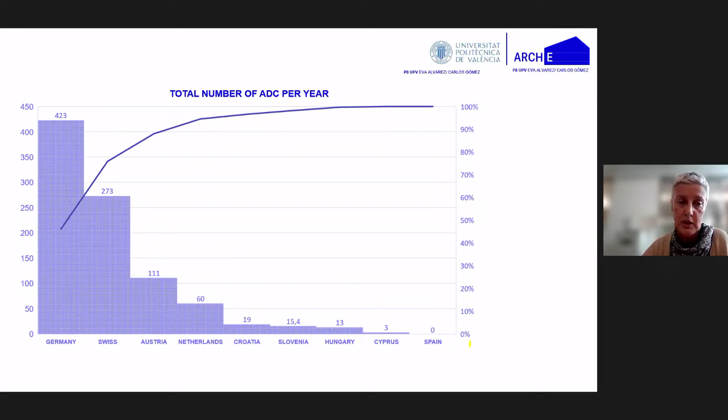We see that Germany, Switzerland, and Austria are the leading countries offering ADCs per year, quite a lot. And we are asking what type of firms are obtaining these commissions.

But Germany and Spain and many other countries have a great quantity of women architects. So the other question is, who is obtaining commissions? We have a gender equality strategy in UA, and we have had some projects funded by EU also, like Yes We Plan, that try to promote women architects and civil engineers in Europe.

From this study, we also kept seeing that the majority of women architects and men architects work in offices of only one person or at most five persons. The majority of them work in small offices.

So why is gender diversity, or diversity, important related to these topics? Because many persons on the margins, or not in the focus, have taught many things that were important for architecture. Many persons have observed other ways of doing, or different ways of living.

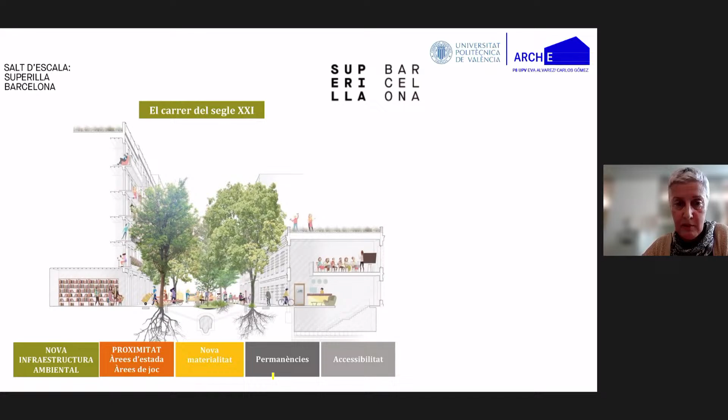This care is important. Also, it's a question of market and a question of business, but this is not the main point. So coming again to this relation between awards and competitions, okay, 5 minutes.

We see that Yes We Plan proposed different solutions to questions related to networks, related to the reference requirements to access small and medium-sized offices to public procurement, and the way we try equality in the invitations for architectural design competitions.

And of course juries, that we have discussed today. Many of the awards have been given because of the juries. If we have a statistic to evaluate how gender influences public procurement and ADCs, we should emphasize the benefits of gender equal approaches to all our work.

Many of these awards have moved forward, like this Austrian Award for Women in Architecture, the French one, the work of the RIBA in the UK, or of course the New European Bauhaus talking about togetherness, sustainability, and Baukultur.

Of course the Mies Awards too, and some reflections to finish. We are talking about how the awarded proposal becomes a reference, so it's important that we confirm juries and briefs and these opportunities.